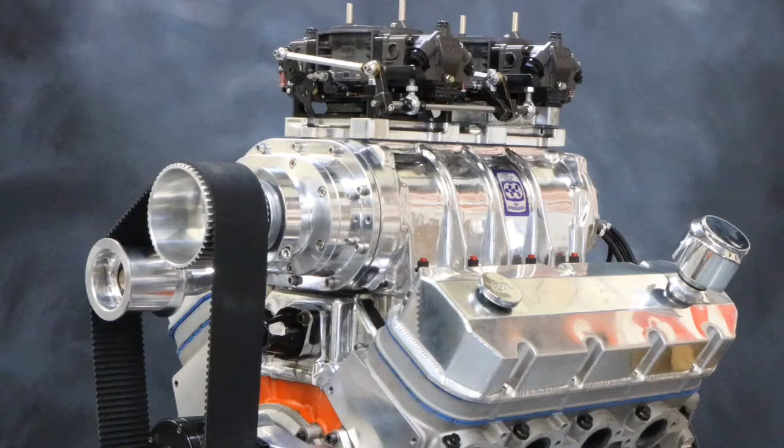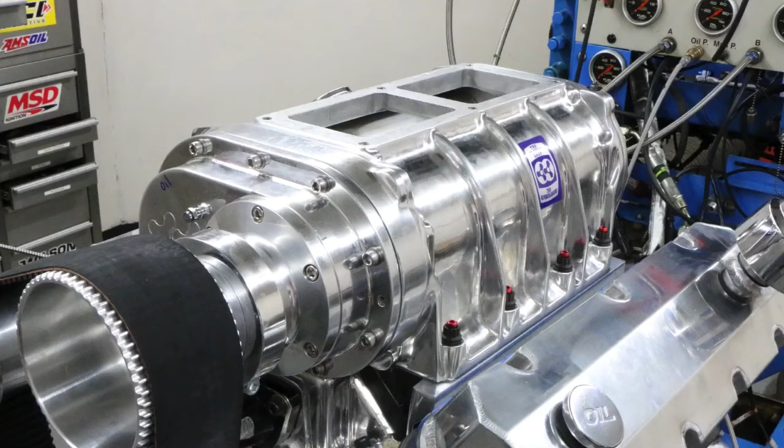If you had a big, awesome, polished 671 supercharger, what would you run it on? Big block? Small block? LS? As it turns out, I ran the same 671 supercharger on 6 different combinations, ranging from less than 400 horsepower all the way to nearly 1,000 horsepower.

Let's check it out. In this video I'm titling 671 versus the world. I ran the same 671 supercharger from the blower shop on 6 different engine combinations. And because these were different engine families, naturally we needed different blower kits. Those are all supplied by the guys from Speedmaster, but I ran the same blower from the blower shop on all of these combinations.

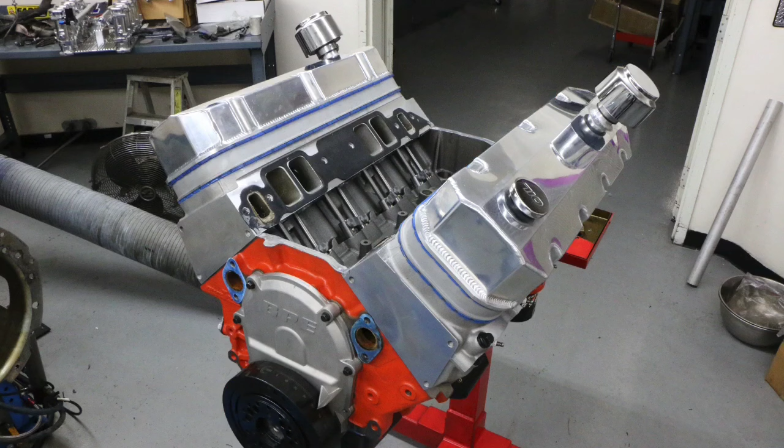We started out with a simple 190 horsepower crate 350. We also ran it on a 372 stroker, aka the Gladiator 2, owned by Westech. Then we stepped up a little further to a 383, but the 383 was actually an LS 383. Then we stepped up to the big blocks. We started out with a 454 modified. Then we stepped up to a 496, even more powerful, and then finished things off with a 540-inch power adder crate motor from the guys at Blueprint Engines.

Let's check it out. In this series on the 671 supercharger versus the world, the first combination is the mildest combination. We're going to go from mild to wild.

We're starting off with a bare bones, just your basic stock 350 crate motor. This is a 190 horsepower crate motor, how GM advertises it. It actually makes closer to 260 or 270 when you put a 4-barrel intake manifold on and a 4-barrel carburetor and a set of headers, obviously a distributor. It comes kind of as a long block. This was a crate motor that we, as I said, added a 4-barrel intake, 4-barrel carburetor, set of long tube headers, and we put it up on the dyno and ran it NA.

This thing made 271 horsepower, and 351 foot-pounds of torque. But here's what happened when we installed the 671 supercharger.

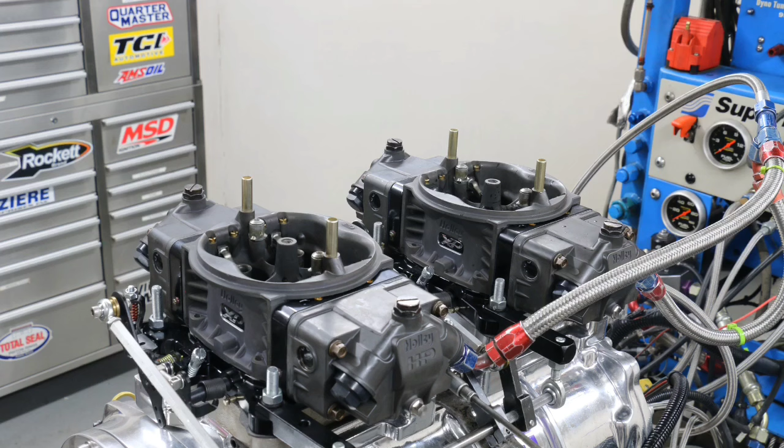This was a blower shop 671 supercharger, and this was a Speedmaster kit using that blower. Here's what happened when we put our blower on there with dual carburetors. Although the interesting thing is I also ran this with just one of the carburetors hooked up, and it made the same power, which just goes to show you we weren't making very much power. It didn't need very much carburetion. But here's what happened when we put the 671 supercharger on.

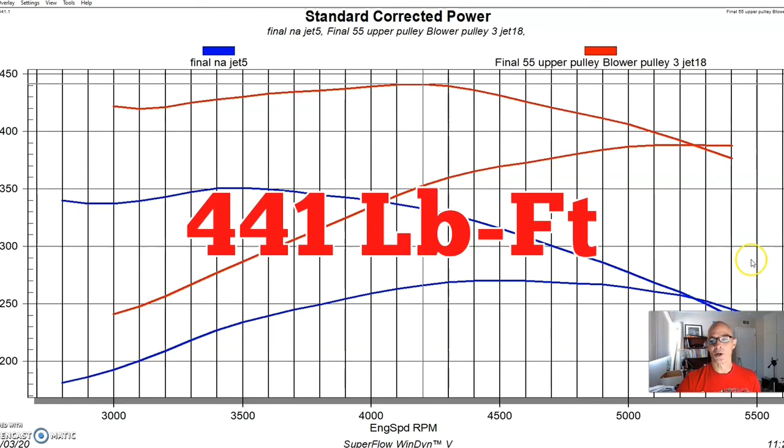How much did our 671 supercharged small block make? A whopping 388 horsepower and 441 foot-pounds. And this was actually at about 9.5 or 10 pounds of boost. Now that's not a lot of power at 10 pounds of boost, but we weren't starting with a whole bunch to begin with because this was a fairly mild combination.

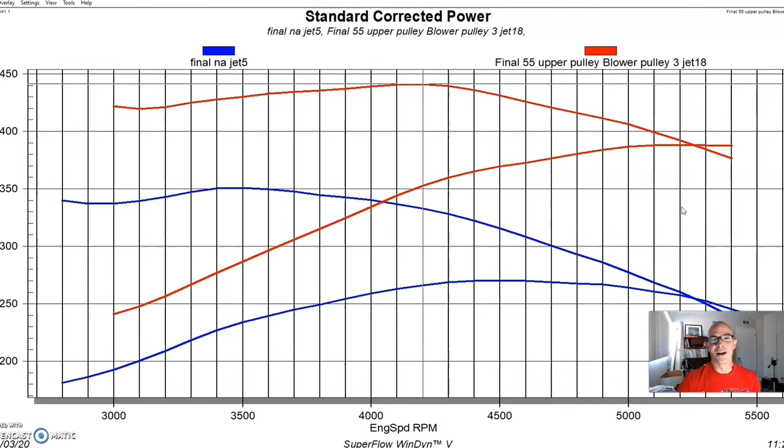This would be more for the guy that's just interested in having a supercharged small block, because he's going to be driving around with a blower motor, wants the thing to drive nice, which this combination would, because it's got almost no camshaft in it. And it would drive around nice and it would look good. It just doesn't make a lot of power. So this is looks only with a blower 671. Let's get to our next combo.

The next motor we applied our 671 supercharger to was much healthier than that basic 350 crate motor. It was actually a 372-inch stroker. It was a Dart SHP short block belonging to the guys at Westech, and it's the Gladiator 2, and they call it that because it's run so many different tests, including this test on a supercharger.

So the Gladiator, I'm going to go ahead and show you the specs here rather than go over all this stuff. You guys can read this, but it's a 372 SHP short block, 10 and 3/4 to 1, AFR 195 heads. Here is the camshaft that was run on it, and the lift, split, and the intake and all that stuff. So you guys can take a look at that and see this is a fairly healthy candidate. I mean, it's making over 500 horsepower. We only revved it to 6,500, and it'll actually go farther than that as a hydraulic roller cam.

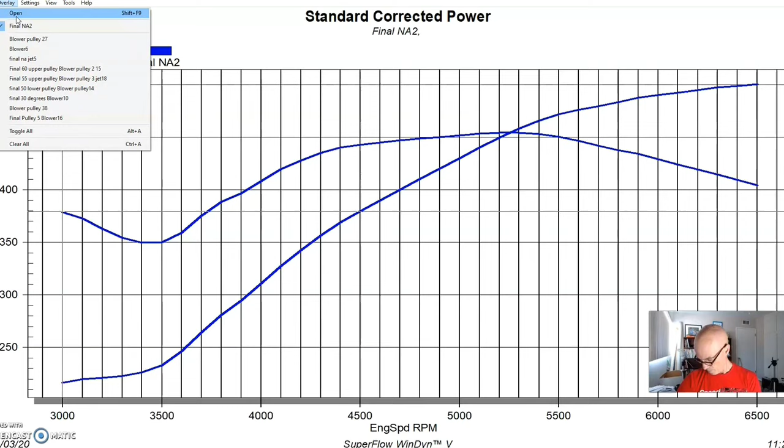But here's what happened when we installed the same 671 supercharger on this 372, and we ran it at a couple of different boost levels.

So this was at about 4 pounds and picked it up to right at 600 horsepower. We stepped up to 5.2 pounds. And then finally up to 7.3 pounds, where we're making a pretty good bit of power.

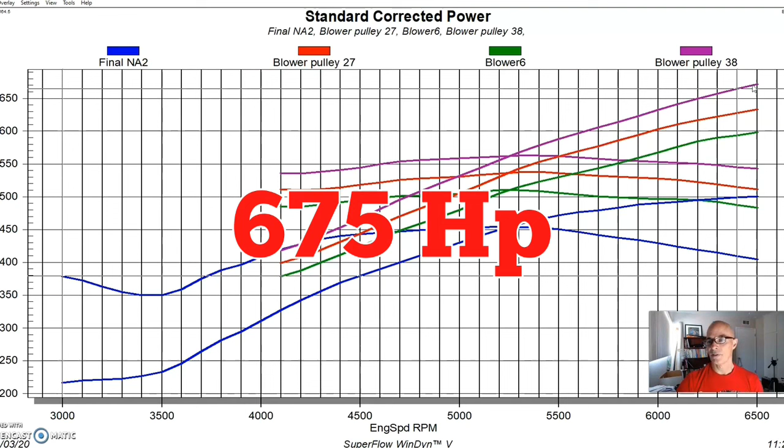About 675 horsepower at 6,500. As you can see, it's still climbing. We didn't rev it any higher than that, but it would certainly continue to make power. It's a big step up in power on this small block compared to running the same blower on the other small block with a mild combination that was kind of a looks-only deal. But here's the 372 with the 671.

So now let's step up to a 383 LS. After running our 671 on the pair of small blocks, it's time to switch over to an LS application, and this was a little bit healthier combination. It was a 383 stroker LS, meaning we started with a 5.3 liter or a 4.8 block, doesn't matter either one. We stuck a 4-inch stroker crank in that, also bored it out to 3.905. This particular one had Wiseco forged pistons and K1 rods, and also a Speedmaster 4-inch stroker crank. It was a 4340 crank, so more than strong enough for what we were doing.

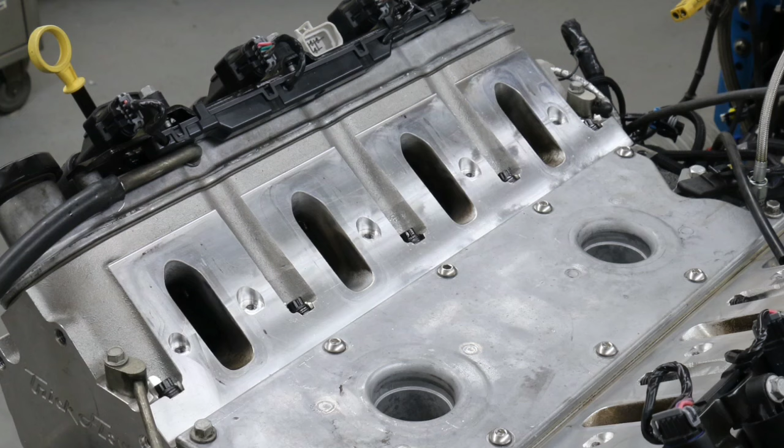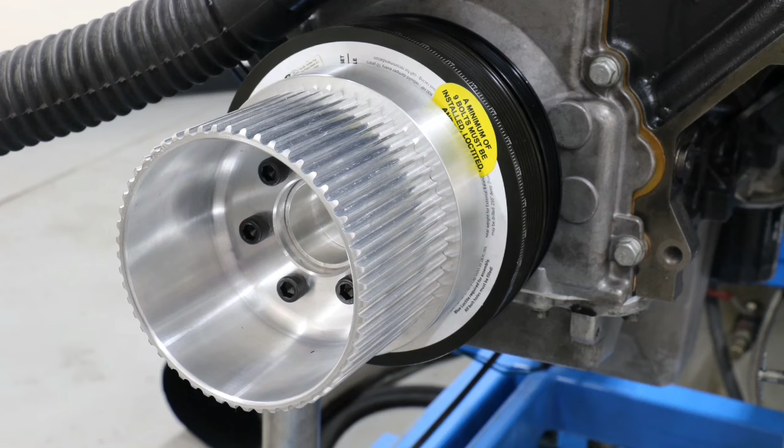It also had a set of Trick Flow Gen X 225 heads, plenty of airflow, and a healthy Crane cam, 624 lift, 232/242 degree duration, and 112 degree lobe separation angle. As you can see, a couple other good things, an ATI dampener, inch and 7/8 headers. We also had a FAST LSXR intake and 102 millimeter throttle body.

And when we ran this thing NA, it was already making good power. It was a 383, it made good power, 548 horsepower and 503 foot-pounds of torque.

So now let's take a look and see what happened after we installed our blower. Again, like the others, we ran the 671 with 2 Holley carburetors on it, so it was supplied fuel not through fuel injection, but through carburation. So here's what happened when we installed the blower.

The blower was set up with pulleys to provide a peak boost of about 7.3 pounds. As you can see, the power curve is still climbing. We have a rising boost curve, so the power curve is still climbing. We could continue to rev this out. We just wanted to show that you could put an old school 671 supercharger on a more modern LS application, and it works just fine.

If you supply boost to a good, powerful, baseline LS motor, good things happen, and that's what happened here. We made over 750 horsepower, even at just 7 pounds. So this was a good combination. It would look good driving around on the street. What's cooler than having a 671 stick out of the hood?

Now let's take a look at some big block applications. The first of the trio of big blocks that we applied the 671 to was the mildest, and as I said, we're going to go from mild to wild, or at least up in displacement anyway.

This was a 454, and it was a Gen 6 junkyard motor that we put ring gap in. We also installed a camshaft and a set of cylinder heads. We replaced the factory heads with a set of Speedmaster aluminum heads, and also installed, the Speedmasters were as-cast oval heads.

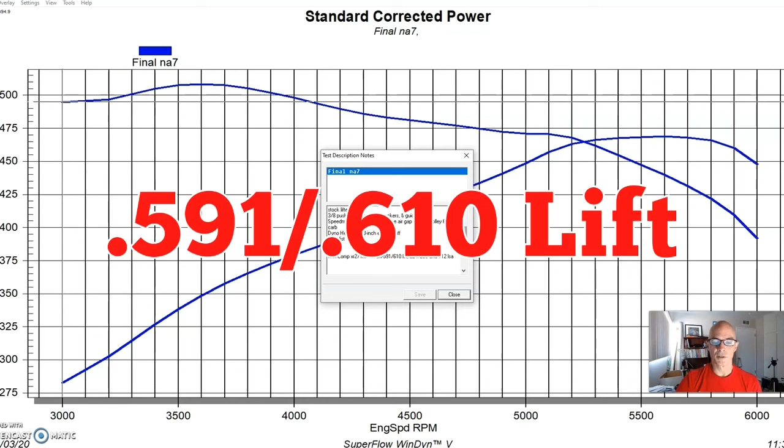We also installed a Comp XR271 HR12 cam, and this was a little bit different than the one we normally installed. This was the higher lift version, which was 591/610 lift, 224/232 duration, and 112 degree lobe separation angle.

So it had aluminum heads and an aftermarket cam in it, but the thing that happens when we put these heads on, it also lowered the compression compared to the factory heads, because most big blocks are going to have the 121 or so cc chambers, and our factory Gen 6 heads had 102 cc, so we lowered the compression quite a bit. Not always a good idea, but you get extra flow, you got to balance it out with less compression.

So here's what happened when we ran this motor with a dual plane intake and the 750 carb. It produced 469 horsepower and 508 foot-pounds of torque.

Here's what happened after we installed the big block kit, and remember, this is the same 671 supercharger that we ran on all of these. So we ran it at a few different boost levels, starting from as low as 4 pounds, which pushed it up to a little under 550 horsepower. And then we went from basically 4 pounds all the way up to 9 pounds in stages. We'll go through all of these stages here.

And these are all just pulley swaps. All we're doing is changing the drive ratio basically of the supercharger relative to the motor.

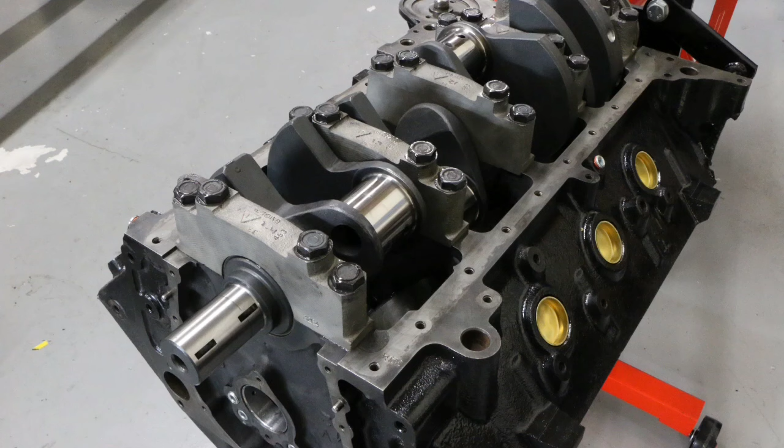So we can take a look at our test description here. It was a Gen 5 block. It had CP Carrillo Bullet Series rods and pistons in it. It had a scat crank in it, the 4250 stroker crank. It had my kind of go-to big block Chevy cam, that comp BR314.

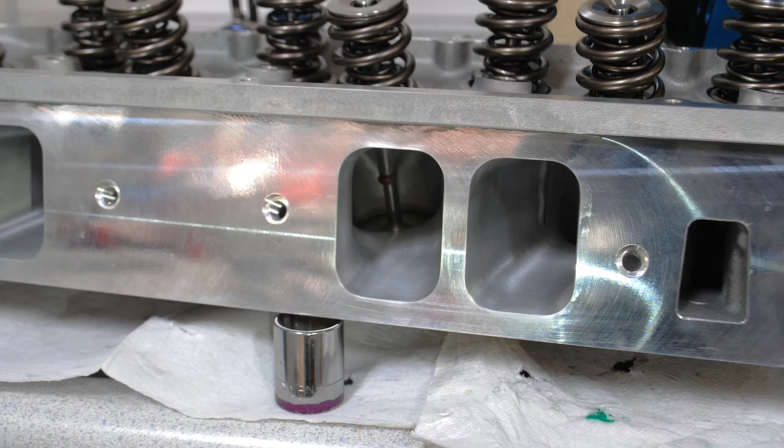It had a set of ProMaxx CNC heads, listed here as a 355. They were actually 340 heads, the same heads that I ran on a 572. They work really well. You know, Milodon oil pan, Edelbrock Super Victor, and a big Dominator carburetor when we ran it NA, although we ran 2 carburetors on the 671 Supercharger.

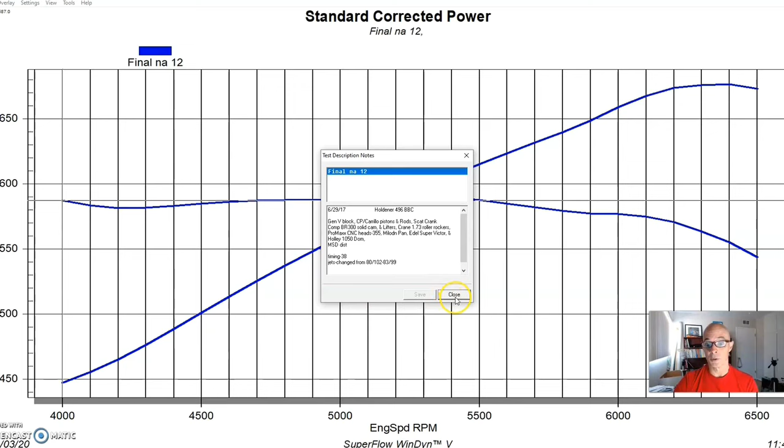So run in this manner with a fairly mild camshaft, this combination produced 676 horsepower. Peak torque was 590 foot-pounds of torque. So here is, once again, our 671 Supercharger.

So our first pulley ratio brought actually under 4 pounds, about 3.5 pounds, where we made 809 horsepower and 685 foot-pounds of torque.

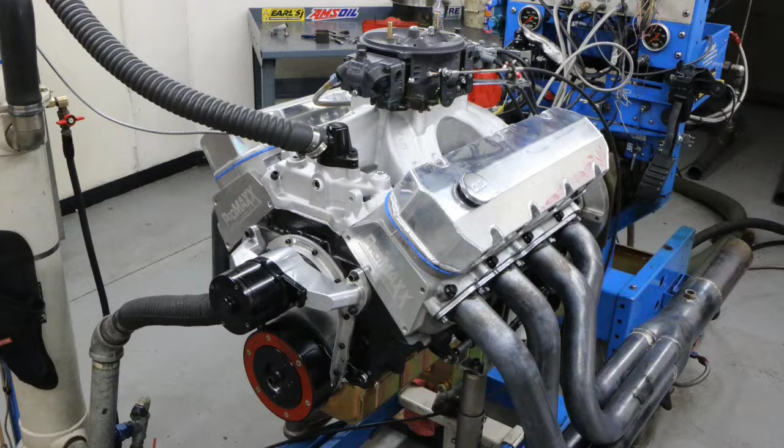But we stepped things up just a little bit, up to 6.8 psi, where this thing made over 900 horsepower. It made 928 horsepower. Peak torque checked in at 790 foot-pounds of torque. So this 496 was fairly efficient NA, which helped it make even more power at a lower boost level after we added the 671 Supercharger.

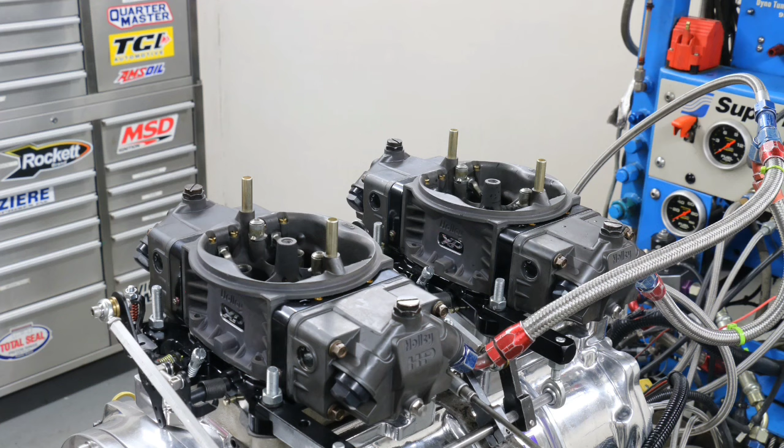Remember, none of these are intercooled, basically relying on the intercooling provided by the carburetors as they supply fuel through the blower. The charge temperature goes down.

Let's take a look at our final combination, which is a 540. Our final test was on the biggest motor, although it wasn't the most powerful naturally aspirated motor. That actually belonged to the 496.

This was a 540 crate motor from the guys at Blueprint Engines, and it's a low compression motor. It used their as-cast big block Chevy aluminum head. It had the same camshaft in it, the same go-to comp cam, that 300 BR14 cam. And we ran it with a single plane intake and a Holley carburetor.

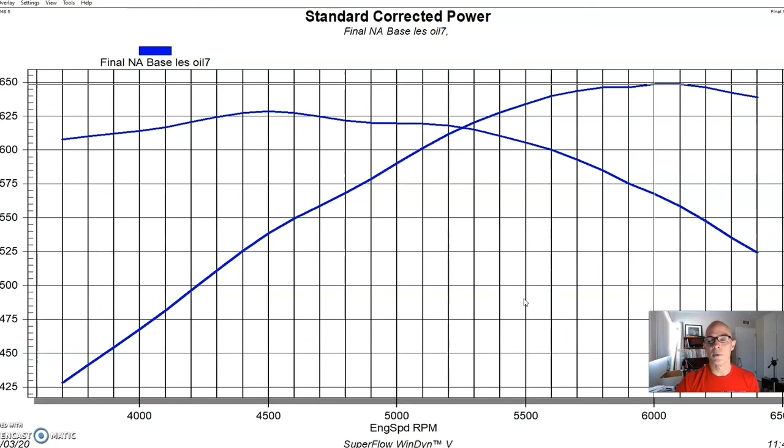Equipped as such, this low compression 540, because it was a boost-ready short block or boost-ready crate motor, it produced 649 horsepower and 629 foot-pounds of torque.

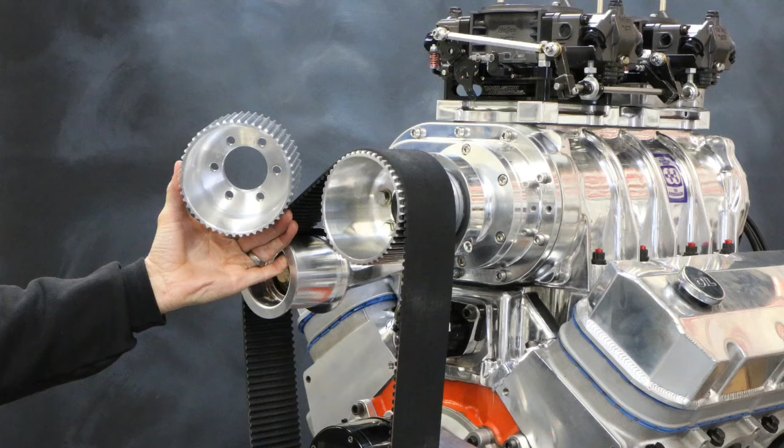So here's what happened, and like the others, we ran a variety of different boost levels on this 671 Supercharger, starting at a little over 4 pounds. We were getting up close to 800 horsepower. We ran 6.1, pushing us up near 850.

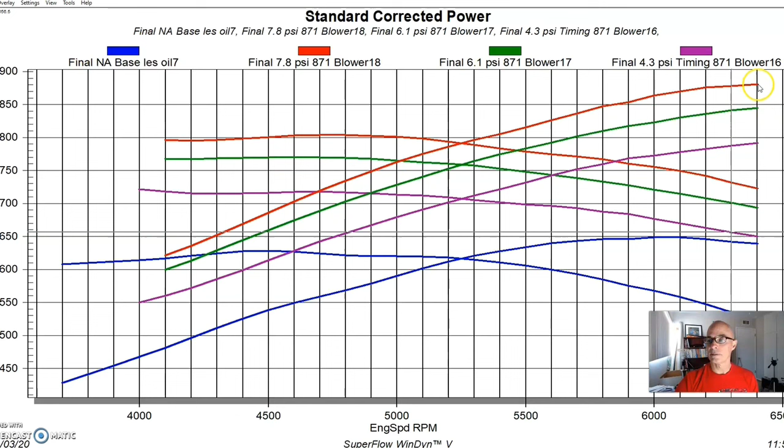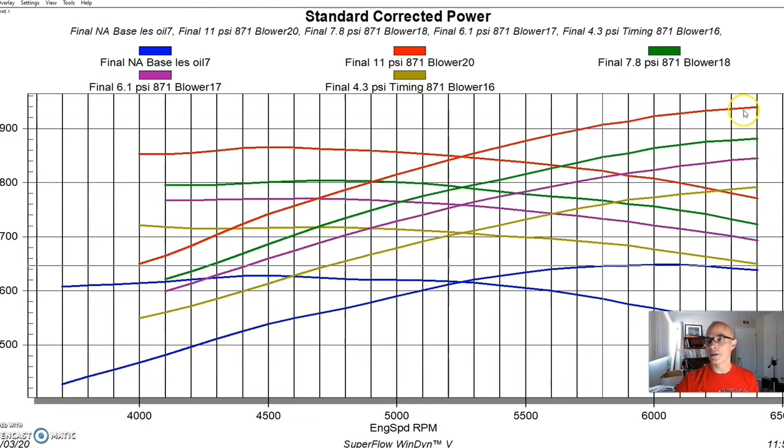7.8, getting up near 900, and the final run at 11 pounds pushed us over 900, and that was 938 horsepower. Yeah, 938 horsepower.

So you can see, just like with the others, as we go up and up in boost, we go up and up in power. The thing is, on this combination, and also on the 496, with this 671 getting near 1,000 horsepower, we're kind of getting probably near the limit of the 671.

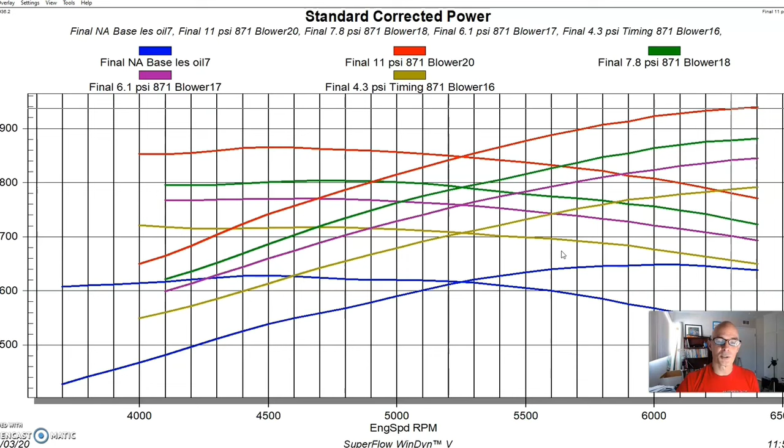Ideally, on a motor this size, or even the 496, if we really wanted to make power, we probably should step up to an 871, which would allow us to make even more power, although the blower shop blower did very well. And as we saw, ranging from our stock 260 horsepower small block Chevy all the way up to this 540-inch motor, the 671 works good on all these combinations.

Let's get to our conclusion. After running our 671 Supercharger from the blower shop on 6 different engine combinations, I got one question: what would you guys run it on? What engine would you apply this 671 to, and what kind of car would you put it in? Let me know in the comments.